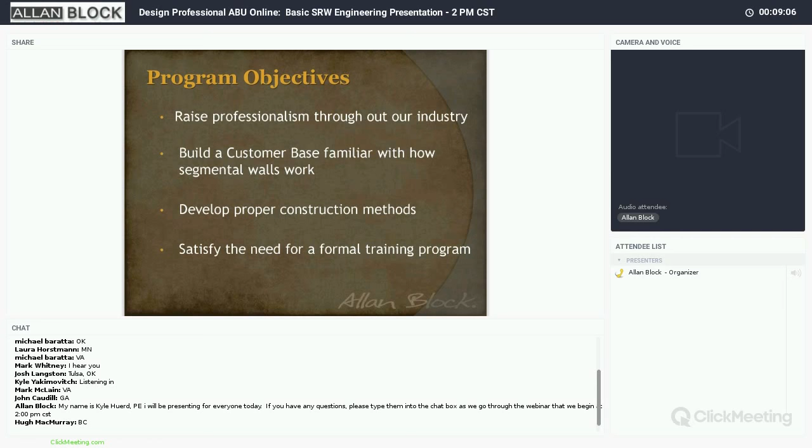So, education-wise, feel free to share the links, but our objective is to make sure that everybody is familiar with segmental retaining walls and how they work. And then we're developing those proper construction methods, and this is really that need for formalized training.

So I had mentioned best practices. This is actually the first page out of best practices that we'll discuss more in depth in August, if you attend that. I believe the last Thursday of the month is August 30th. This really is to start the conversation on having the wall designed early on in the process.

In today's world, we almost do a performance design, and this best practices is really towards an initiative called zero wall failures, and that's really what we're going for. We don't want a wall to fall down. Everything we want to stay vertical. If a segmental retaining wall falls, it's really a black eye for the industry.

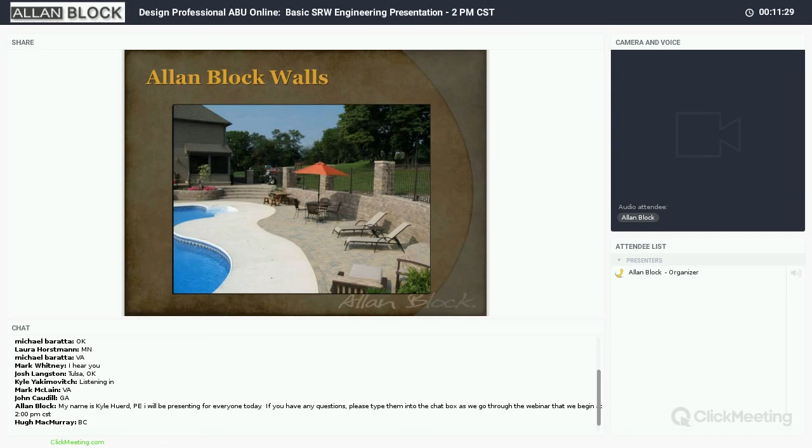So segmental retaining walls can go definitely anywhere; it's kind of sky's the limit. There isn't a max height to a modular block retaining wall. We'll talk about different design reinforcement options through today.

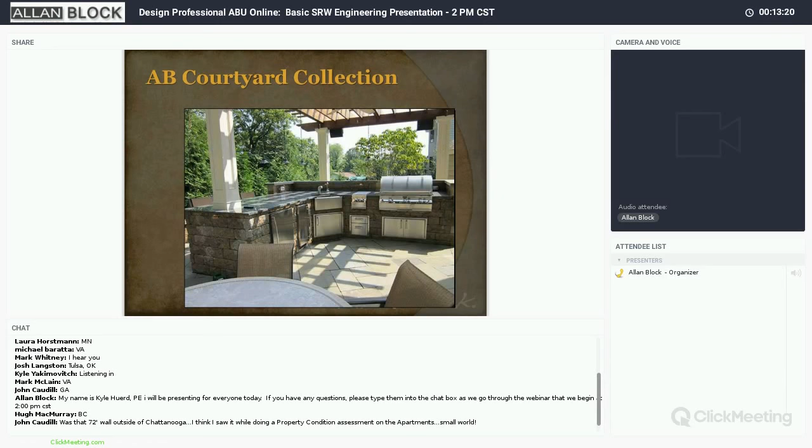So if anybody wants to really play with Legos again and not get looked at strangely, you can always go to one of our distribution locations, and if you've got a small little project, this literally goes together really quickly. But really, your outdoor living, taking those rooms into your backyard.

So the Allan Block advantage is really, I'm not going to bash competitors today. We understand as an industry that when one modular block works, they pretty much all work. There's slight differences between blocks, and there's features and benefits to every one of them. And if one modular block wall fails, it's a black eye for everybody. So from our stance, we really do not want to see a wall fail or fall down or have issues with it.

So our advantage is really, as I've already mentioned, there's 5 engineers here in our office. You can reach out to us at any given time. Regardless of what product you're looking at or using on your retaining wall design, feel free to use us as a resource. We do retaining walls every day. We work with engineers and professionals around the world to help assist on your projects. There isn't a cost to any of our services, so use us, use our local resources.

We do training with our technical reps around the world as well, so that they can bring that technical side right there to your office and stop by and help you out on your project as well.

And then on that training level, there is a certification program. If you didn't know, there's 2 nationally accredited certification programs. There's the Allan Block certification course, and there's the SRW installer course from the NCMA. Both of them are pretty much the exact same program. They have 3 different levels to them.

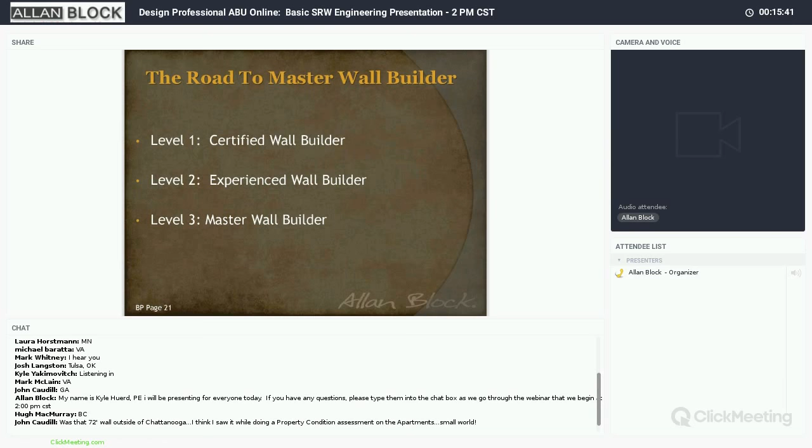So for instance, that 72-foot high wall, hopefully, John, the installer was a Master Wall Builder, somebody that had used the block over and over again. Mainly because we don't want, as I always say, Joe with a pickup truck and a shovel. Make sure that they aren't the low bid and they're not coming in and building this wall without the experience level. So we can qualify contractors from the engineering side, and you can do that through those programs.

I usually ask, since you guys don't have audio with me, if you know the difference between dry cast and wet cast concrete. Being that I'm the only one talking, I'll give you the answer as well as asking. Hopefully, Andrew, you get audio up here shortly.

Wet cast is exactly what it sounds like. That's coming out of a cement truck, for instance. It's a poured wall. Or it's poured into a mold, and then that mold is typically stripped off 1 or 2 times throughout the day. When that mold is stripped off, you're making a block every time it's stripped. So you might be manufacturing 2 blocks per day per mold. And if you have 2 molds, you're at 4 blocks.

Dry cast concrete is the exact same ingredients. So you've got your Portland cement, your aggregate, but you have just enough water to saturate or hydrate the cement, and you're almost creating a sandcastle.

So what that's done, that material is put into a mold box, and then that mold box comes down and consolidates, compresses everything into really a block, and then it's stripped off. Well, typically you're making 2 blocks face to face. That's how you get that split face block, and you have a cycle every 10 seconds. So you're making technically a block every 5 seconds that goes into a kiln and then comes out the other side at your compressive strength or above.

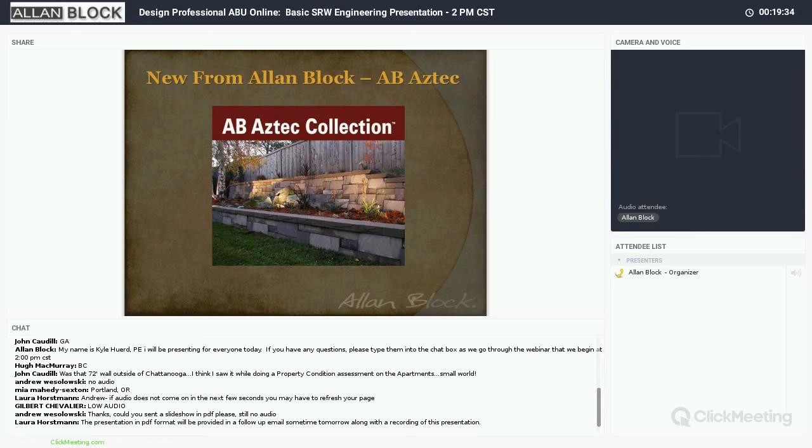And Aztec is really kind of the new product, new from Allan Block here in the last couple of years. It's really a smooth face, kind of textured block. So it's getting away from that split face. We've heard kind of coast to coast that everybody wants a different aesthetic, a different look, and that's what this product line is really bringing to that, which I'll show you some pictures here in just a moment.

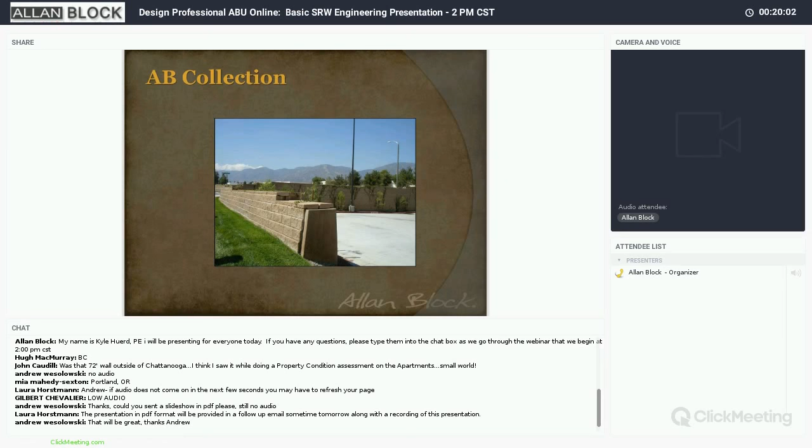But that AB collection, we've seen it for quite a few years. You had that tri-split block in the 90s, and now it's kind of that straight-faced, still split. This can be residential, this can be commercial, this can have fences above, parking lots above, slopes below it, you name it. It is both a backyard and a commercial product.

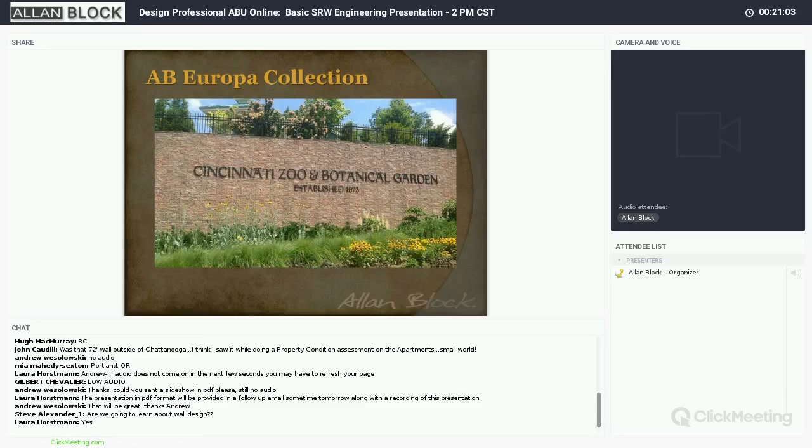Or getting into that Europa collection. That is really kind of that tumbled product. So you take the same block and you beat it up more or less, and it gives it that old style look. So whether that's, again, residential or commercial work, whether it's the Cincinnati Zoo or a commercial property like this, that product again works universally there.

And then the Fieldstone. That is really that natural stone kind of look, that chiseled rock. It does have two different anchor units. You've got a short anchor and a deep anchor. And where that comes into play is so that you can transition from, remain as a gravity wall.

So if we were on a 27-degree friction angle soil with roughly about 12 inches measured from the front face, we're able to get about 3.5 feet before we have to use geogrid or some sort of reinforcement option. If you switch to the deep anchor unit, you can almost hit 6 feet. So you can see if you have a tight site constraint, Fieldstone can definitely be an option.

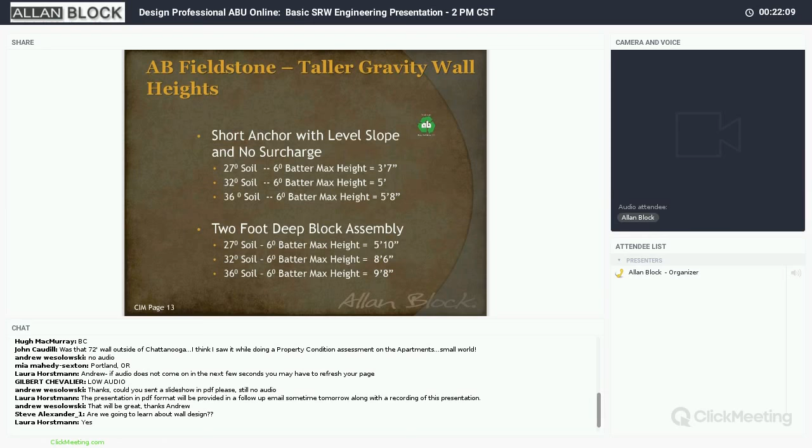But I always recommend reaching out to your local rep, technical rep, or giving us a call to see about availability because Fieldstone may not be local to you. But again, residentially, commercially, you name it, the products don't have that limitation to them.

So really this is kind of a mix between that outcropping block, again, residentially, but upwards of about 8 feet when it's turned over there and butting up to the house on the one side.

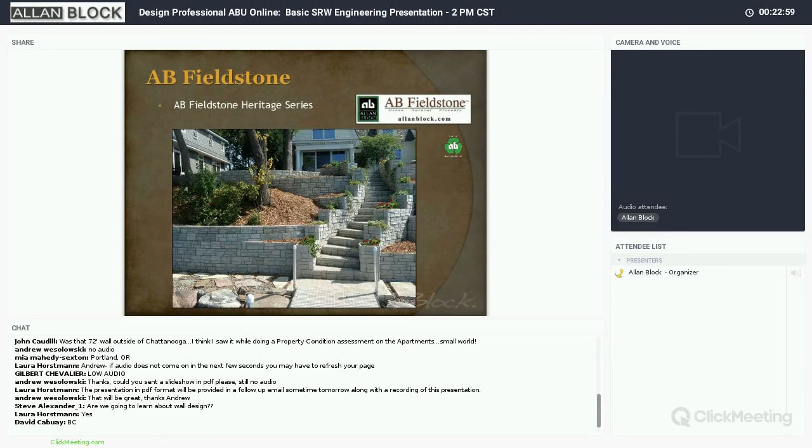And then I had mentioned wet cast. This is actually a wet cast product right here in Minnesota, off Lake Minnetonka, if those of you have ever visited beautiful Minneapolis. So this is a wet cast product, or a wet cast face, with our fieldstone line. So we do have both ends of the spectrum. We've got the dry cast and wet cast, and really just kind of looking for that aesthetic or that solution for your clients.

And then the Aztec. That Aztec is really, here in the last couple of years, been very new to the industry. This is the exact same AB Classic block right here. It's just we put a division plate in between in the mold, so we no longer split two blocks apart. We have a division plate there that gives it that texture. So nothing new on the manufacturing side, but aesthetically it looks completely different.

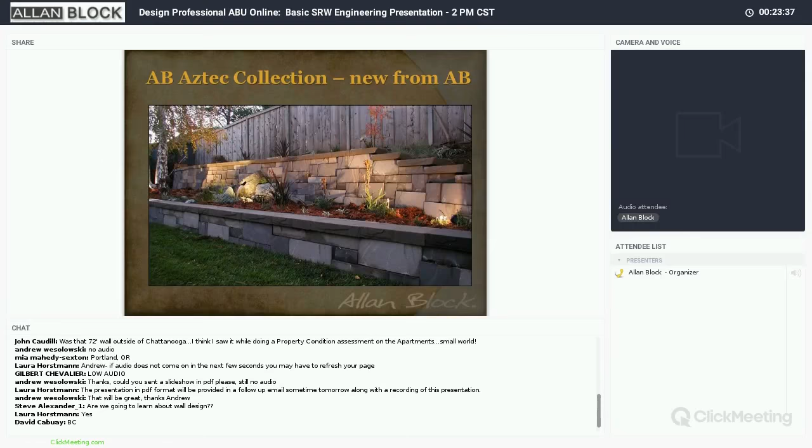So a project here in Cincinnati, Ohio is actually where this one is. So all 4 block pieces put together to create that. And then if you want to incorporate split face block into that smooth face, the Aztec line, you can accent different things and show a lot of different combinations. And all those blocks are exactly the same. You can see here the base course under this wall is all AB Classics, which is our split face block. So they work together. It's still that 6-degree block and works universally through there.

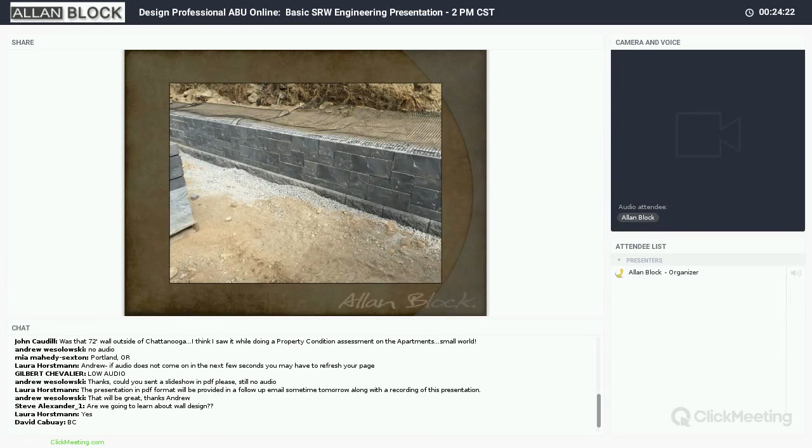So very straightforward. That's as much as I'm going to talk about the product line itself. So I appreciate you taking a little time here to run through that.

To give you the history, Bob Allen Gravier is who started Allan Block. He is the founder of Allan Block back in really the 80s when all modular block walls began. They all began right here in Minneapolis. Whether it was a long winter and everybody just was bored and came up with a block design, Bob came up with his and moved forward.

So I always joke and say this is Bob's first Allan Block we're looking at here with the pyramids. So obviously not the case, but this is dry cast concrete. It's a mortarless construction. That's what the pyramids are built out of, is our dry cast concrete. Made a little bit differently, but same concept. So we know that dry cast concrete lasts the test of time, and we can prove that with the pyramids.

So Bob did get beat up a little bit early on in the industry, mainly because he had a block that was hollow, and he had a front lip configuration to the block, and he didn't have pins. So those were things that the industry instantly started off with: you need to have a solid block and pin system. Today, we've evolved to a point where almost every manufacturer nowadays has a hollow core system, or they're hollowing out the core to really increase performance and shipping, different benefits to that.

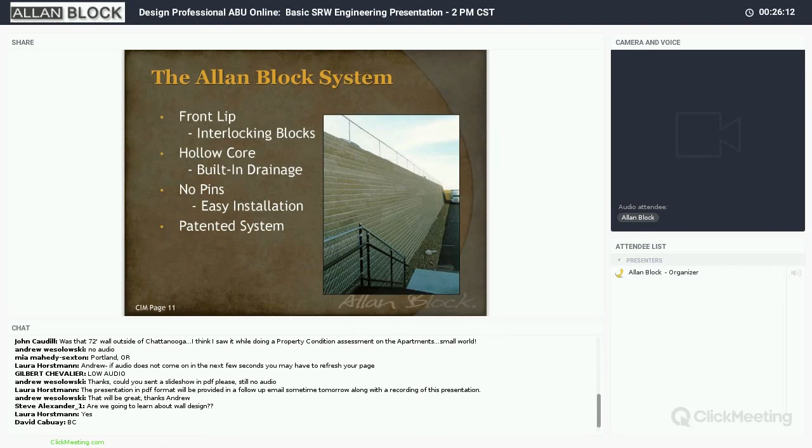So I can always say that Bob was, I guess, a genius for starting that path and sticking true to it. But he did obviously have some issues at the very beginning and hurdles to come over. But that's what an Allan Block is, kind of that hollow core system. It's got back wings to it.

But the huge benefit to segmental retaining walls over a rigid structure like cast in place or masonry walls is the ability to bend and not break. I do have some animations that are built in here, but they aren't working with this platform. So really what we're looking at is a segmental retaining wall that can bend and change with frost. It doesn't have to go down to frost depth. So in Minnesota, 42, 48 inches, we don't have to bury block down there. We can stick to our 6, 8 inch typical buried block amount.

But overall, I've been told by multiple people in the industry that there's two types of concrete. There's concrete that cracks, and there's concrete that's going to crack. That's just how things are. Well, modular block has kind of those cracks built in. That's what makes them able to flex and move and aesthetically still look good, is we're not seeing those fractures in the block itself. Same with your interlocking concrete pavers. It's the same concept. They can flex and move with the ground. So that's why there's such a large market for those things.

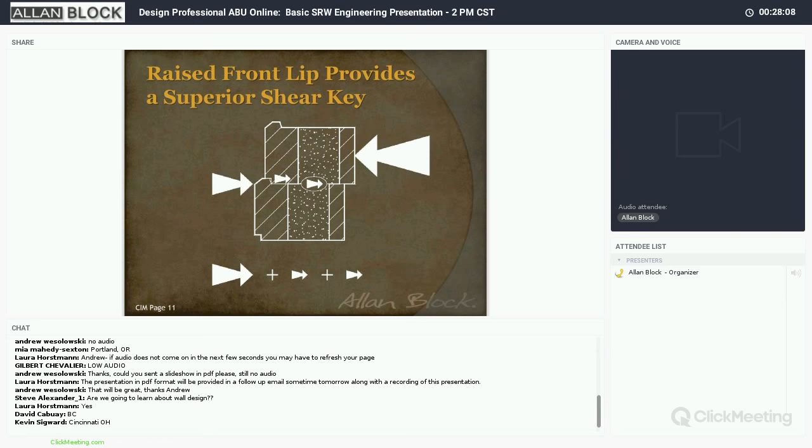So with that lip notch configuration, we have predetermined setbacks. I had mentioned pins. There aren't alignment pins or anything like that for the contractor to use. They stack block and pull the block forward. What you'll notice here is a 3-degree block has a deeper notch on bottom, where that 12-degree block doesn't have as deep of a notch. So you get more batter in the wall. So that's how we can easily switch between two different blocks depending on the application. And it's all preset, predetermined before it even arrives to the construction site.

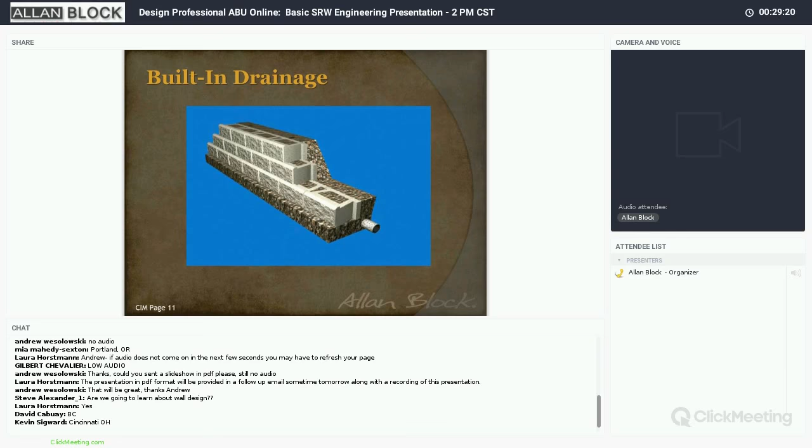And then segmental walls really need your drainage. Right down here, I'm going to point out that drain pipe at the bottom, that needs to be vented to daylight. So commercially, if you've got a storm sewer or slopes below the wall or something like that, that you're able to route that around and come out to daylight, you do need it vented every 50 feet linearly along the layout of that wall. You can come out through the face, which is a very common application.

When you do that, raise that drain pipe up, you want to make sure that this material down here is used as kind of like a road base material. That is, it's got fines in it, it compacts really well, it's going to be impermeable, so that that drain pipe can come out. And really, this is only for incidental water, but we want this almost like a shelf. Water comes down and then navigates out. So that drain pipe should stay dry, and as long as you're routing water above the wall around it rather than through it, it should stay dry 99% of the lifetime of that wall.

And then filtration. I actually want to talk more about filter fabric along the back side here. In the past, the industry has had vertical filter fabric. When the NCMA released their 3rd edition, filter fabric vertically is more optional. And really from the design side, we don't want to run filter fabric vertically because it runs the risk of clogging. And that filter fabric isn't really your landscape fabric, because there are other geotextiles on the market that you could use, like embankment protection fabric, something that's got engineering properties, puncture strength, etc., that we'd use in water applications. We would use that vertically to separate soils and make sure that we don't have moving material.

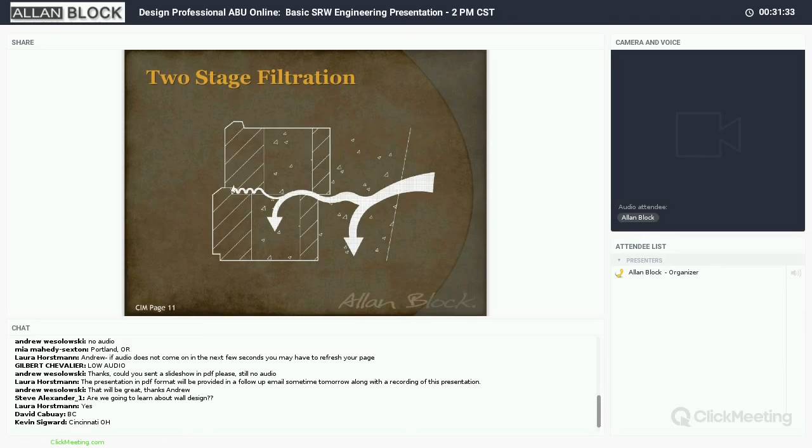And then getting into, I had mentioned a solid block. Bob didn't have a block that was solid when he began. Really, at the end of the day, when you fill a block with rock, with what's called wall rock, your aggregate, your 3/4 inch clean, you get very similar weight. So there wasn't a benefit mass-wise for a retaining wall, since it's all based on mass, that we couldn't get using a block with rock in the core, equivalent to that solid block. So with that hollow core, there are some benefits to it. I'll call it features and benefits here.

Superior drainage: it has technically a secondary drainage field. Even though that is for incidental water, we would hope that any water that does come through there is already captured before it even gets to the wall. But the biggest thing is faster drying. Faster drying helps in the efflorescence category, so there's less efflorescence. Any concrete product can have efflorescence. I always think of brick on a building, because brick's red and you always see the white staining from water. That is efflorescence coming through the product and staining the face, so the chemicals within the product itself actually push through with that moisture. So if the block dries faster, you have less moisture pulling through and therefore less efflorescence.

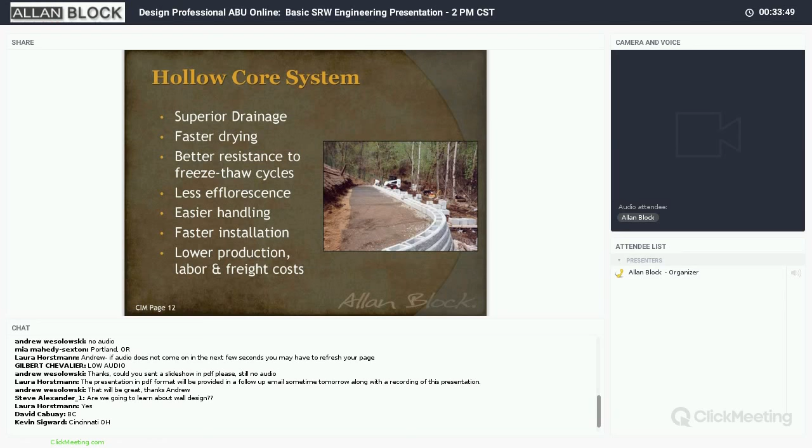So I'm going to go over kind of the basic soils. I'm not a geotechnical engineer, so we're not going to go into the specific properties of soil. I'm actually going to use the friction angle as the natural angle of repose just for today's discussion. And what I'm meaning there is the natural angle of repose here is how high that material cones up. Sandy soil is going to cone up higher than like a clay soil that's very flat and smooth. If you have gravel, it's going to cone up a little bit higher.

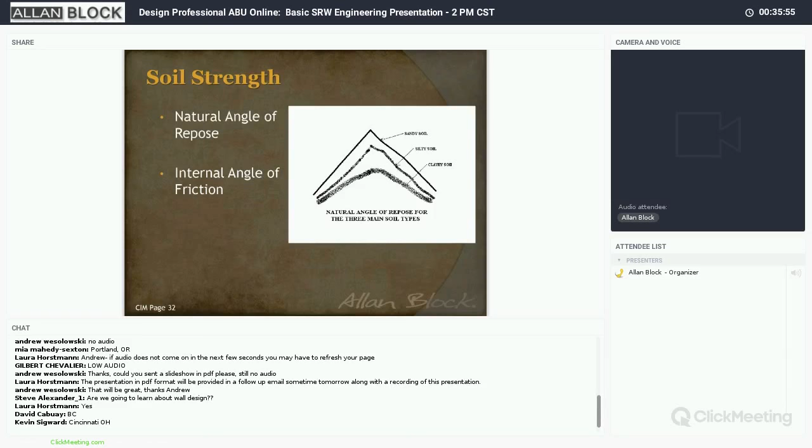Once you add compaction and moisture contents, etc., that's how you get your internal friction angle. That is your calculated or your tested value of that soil, and that's what we use on our retaining wall designs. So again, in today's conversation, we're just kind of going off of that natural angle of repose.

So if that natural angle cones up higher, for instance, the sandy soil has a higher cone, therefore the triangular wedge that's pressing on the back of our retaining wall is smaller. And that leads to our lower pressure. Less soil, lower pressure. Then this clay soil that kind of has this nice large wedge, that's going to exert more pressure on the back of the wall because you have more mass or more driving force there. And that's all based off that active pressure.

So let's talk a little bit about batter real quick and how that calculates into our soil. So if we have our vertical wedge that we just looked at there, in our sandy soils, we've got that vertical wedge. Well, if we take batter of the wall into play, we reduce that wedge. You can see here we reduce it by almost 50%. So a smaller wedge, therefore less pressure again. So that's why many manufacturers around the world have products that are somewhere between 3 and 12 degrees. Most projects are actually dialed in closer to about 6 degrees, somewhere between 4 and 8.

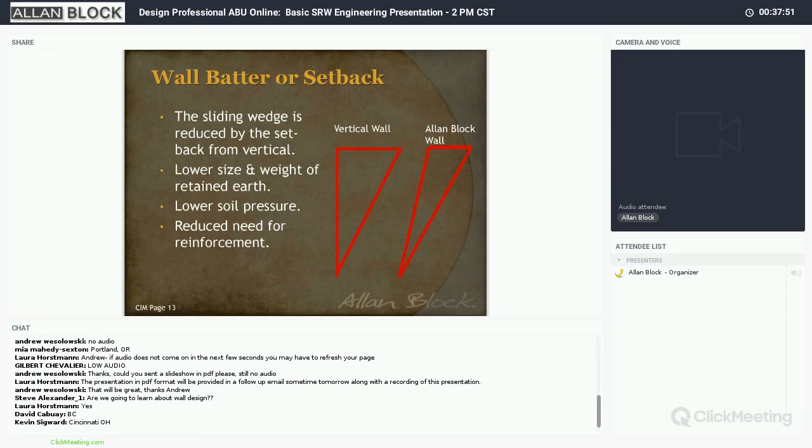So, excuse me. So having those products available, engineer-wise, we're able to reduce the amount of pressure with that batter. But at the same time, we're looking at how much space does that take up. With every setback of a block, you lose some real estate above the wall. What's that balance? In the 72-foot high wall, that has a tremendous amount of batter, especially in 3 tiers, upwards of about 25 feet a piece. So you do have to take that into account.

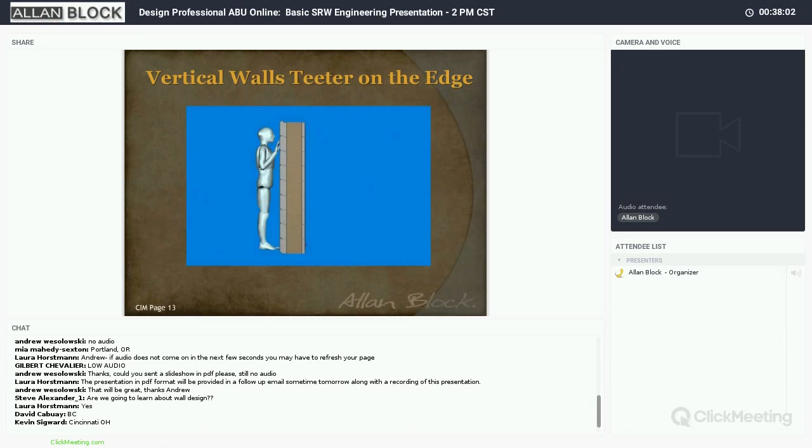My animations here won't work. What I've got is I apply that wedge here to the wall, and my guy falls down. I take that wall and then I push it back into the hillside 12 degrees, and my guy stays vertical. Very similar to what we're looking at here.

So if we look at a 3.5-foot high wall, our active earth force, you'll see 217 pounds. Just with the batter itself, it reduced it 25%. And you can also see your Ka value. So that's our active earth coefficient. That also reduces. So as soon as your Ka value reduces, you have less pressure. And that Ka, I'm about to show you the equation in a couple slides here to really dive into it.

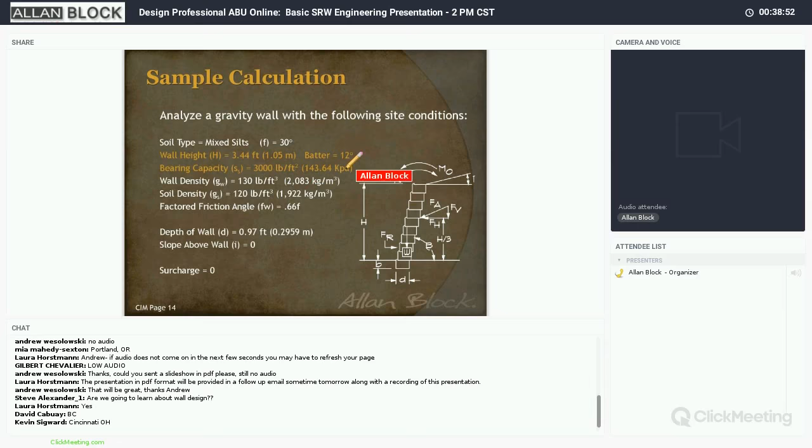So looking at our free body diagram, my example wall here is about 3.5 feet with a 12-degree batter. So when we throw it into our equations, that active earth pressure coefficient is right here. This Coulomb equation is dialed in to include the batter. B stands for batter, F stands for friction angle of soil, and I stands for your slope above.

So on the design side, if you change the batter of the wall, the soil behind it, or the slope above it, you change the design of that wall. Increasing the batter will actually reduce our coefficient here. And it's the same concept if we increase the friction angle; we're also going to reduce our coefficient.

Since our resistant force is all weight on a gravity wall, we're looking at that right here. We drop that into our factor of safety, with 1.5 being the industry standard minimum in sliding. If we look at our overturning resistance, same concept. We're still looking at our mass. Our resistant moment is all due to weight. And in overturning for an almost 3.5-foot high wall, we've got a 2.6. And 2.0 is our industry minimum for overturning.

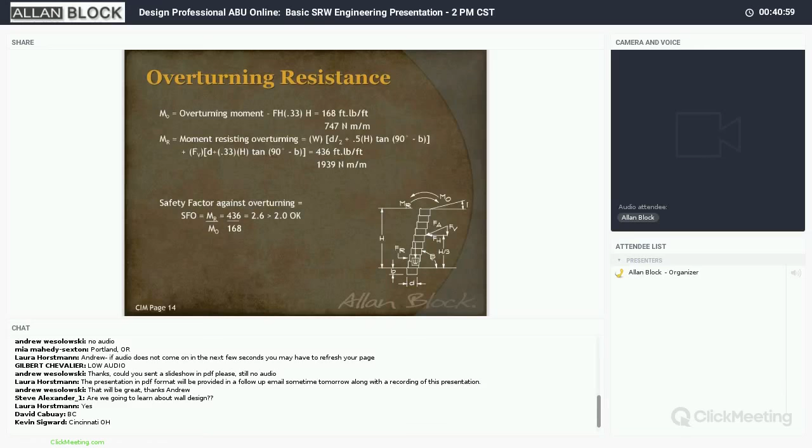And the sliding factor of safety of 1.5 does not account for any kind of passive pressure in front of the wall. Have you guys ever seen a wall that's failed in sliding? It's not too common. Most retaining walls are going to fail in overturning before they do in sliding. But remember, we don't apply any passive pressure in sliding or technically overturning in segmental retaining wall design. So that's an added benefit to the system.

But keep that in the back of your mind, because in most ordinances engineering isn't required until 4 feet. I'm guessing you can drive around your area and find modular block walls that are slowly beginning to overturn, right? And they're probably right around that 3.5-foot high wall where geogrid possibly wasn't used behind there, or some sort of external load was applied. So keep that in mind. It's kind of that 3 foot.

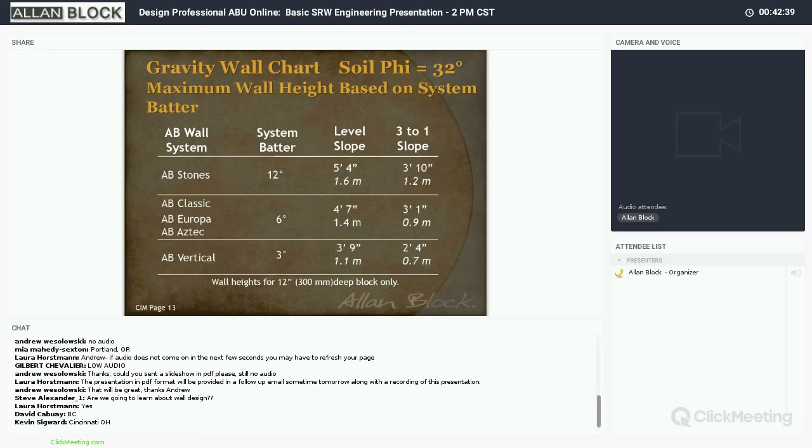Even in good sandy soils, I'll call 32 degrees our sandy material, if we come down here with a 3-to-1 slope above, with that 6-degree product again, right about that 3-foot mark. So 3 foot is oftentimes, for a 12-inch deep block, the max height before you need to start talking about reinforcement. And this is before even adding surcharges, any kind of load above that wall.

So if our gravity wall with a 12-inch deep block doesn't work, you can create a taller wall with what we call a double block wall. With Allan Block, you can take this back block, spin it around so the backs are touching, and then flip the block over so the lip is down. That allows the block to stack up in the same batter as the front face. So we're increasing the depth of that block to 24 inches rather than 12, so we can go taller with our gravity wall.

But if a taller gravity wall or a double block option doesn't work for you, maybe you can use no fines concrete. No fines concrete is a permeable concrete mix. It's a mix without sand, so it allows water to drain through it. You can see here it's free draining.

What that allows you to do is create a block that's any depth you need per the design. So if any of you are familiar with large blocks on the market, this can definitely be an option for you as an alternate. Technically, with a small block and no fines concrete, you're creating a big block on site without that manufacturer's cost.

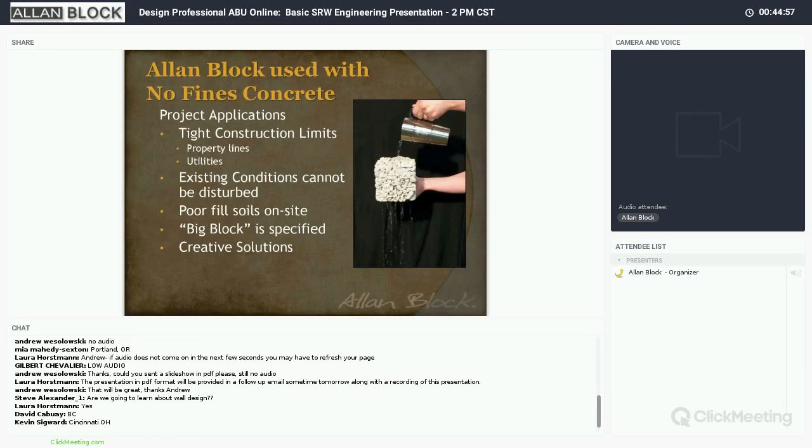You can do it on new construction. You can do it on existing timber walls or existing any retaining wall. You can face it with something different. Now keep in mind that this wall is actually designed so that if this timber wall wasn't even here, this wall has enough mass already to resist all the pressure and the surcharges from the alleyway above. So you're really just kind of sealing up this timber wall into the hillside. So regardless if that deteriorated, you still have enough mass there to resist that.

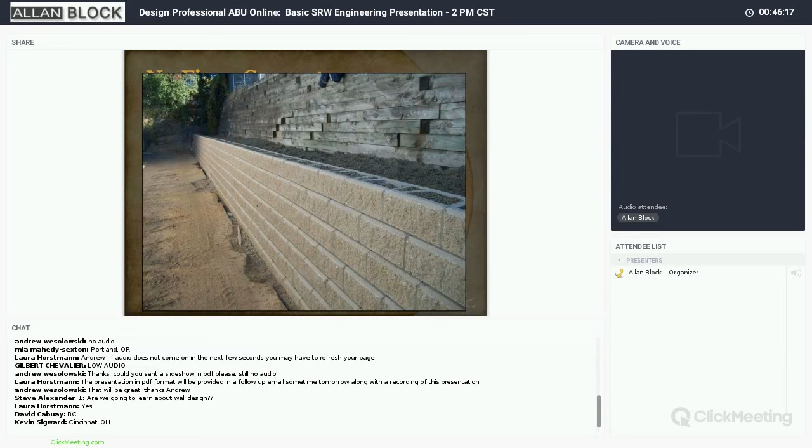So I'd mentioned it's very dry. Some places, if you get into kind of the western side, Portland, so Oregon, Washington, Idaho, that area, we refer to no fines concrete as stabilized aggregate. And the industry has really started using stabilized aggregate more than no fines concrete, mainly because the inspectors, as soon as you hear concrete, they're thinking slump tests and compressive cubes and that sort of thing, where this is really an aggregate that has a little bit of cement in it to solidify and hold up.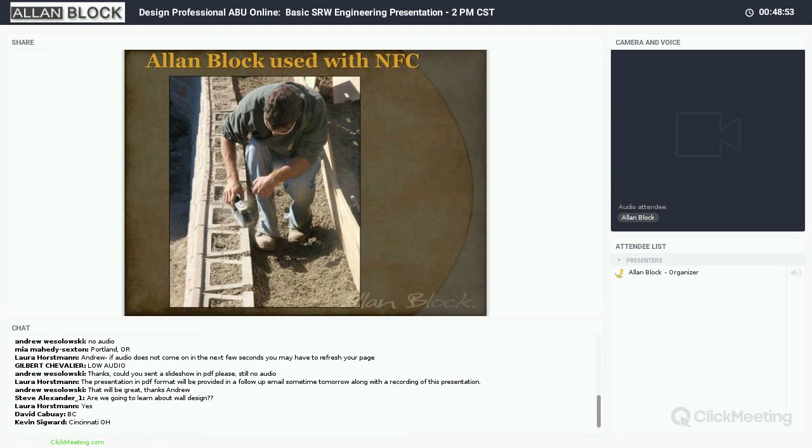Our tallest no fines wall is actually one that I had down in Georgia. It's 26 feet. They couldn't make anything else work. Geogrid couldn't extend into the hillside, so that was kind of their option, and it was still cost effective compared to a rigid structure, sheet pile, soil nails, that type of thing. So definitely options there available to you.

And then we've got a no fines chart. This chart only goes up to 10 feet, but I had mentioned you can do a no fines concrete design within AB Walls, which is our design software. And overall, that design software provides you those calculations and the full package of what you need. But here you could use a quick reference.

Bill, you asked what was the depth of that concrete on the 26-foot high wall. I believe it came out to be 40% the height. So without grabbing my trusty calculator, I think that's right around 10 feet, is the overall depth behind that. But as a rule of thumb, you're probably somewhere between 30 to 45%, which is very common for most of them.

So that's a no fines concrete mass. So we looked at gravity walls, double block walls, no fines. Really, we're going to talk now about soil reinforcement, so geogrid. And I go right back to actually the Great Wall of China here. They used branches actually to reinforce the soil. So that is technically a natural geogrid or a geotextile. And so the history of geotextiles really began back then, very similar to our mortarless concrete.

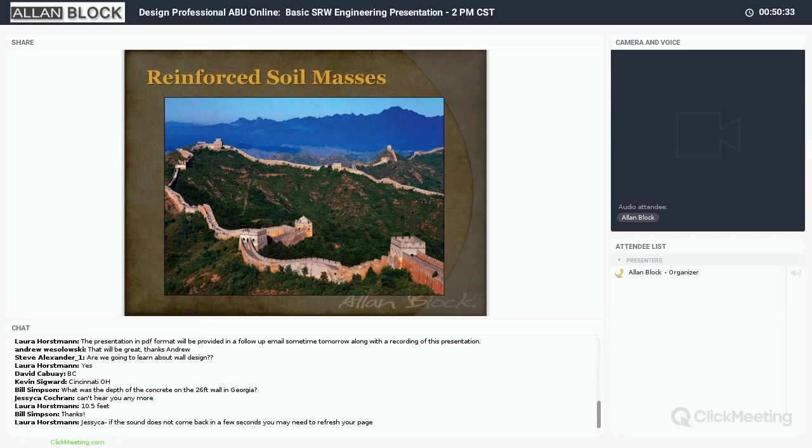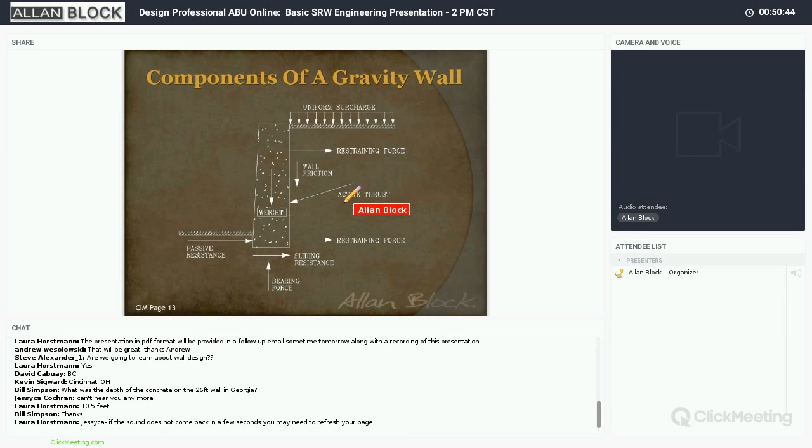So the components of our walls, we need mass. That's really what we're looking for. We need that mass to resist any kind of lateral pressure that we've got, or that active force that's pushing on it. So if we look at, for instance, a cross-section, if we're using geogrid reinforcement, we've got these soil layers coming back; typically your minimum length is 60% the wall height. But technically, what we're doing here is we're reinforcing this mass. This soil is now our new mass that we're going to resist all those pressures.

And this acts as a coherent mass. So the block isn't independent from the grid, which isn't independent from the soil. They all work together, very similar to your concrete rebar designs. Rebar reinforces concrete to add that additional strength to it. So here we're reinforcing the soil with our geotextile.

With that geotextile or geogrid, typically a vast majority of grid on the market is uniaxial. So that means it has strength in one direction. It needs to be rolled out properly. And that is something that we emphasize in the contractor training courses that I had mentioned earlier. Make sure that the contractor rolls out the grid appropriately. If it is a uniaxial grid, you'll have strength here that you'll roll out perpendicular to the wall. But you actually have only about 60% that strength in the opposing direction. So if they rolled this out incorrectly and we need that strength, we now lost that and we could potentially have an issue long term.

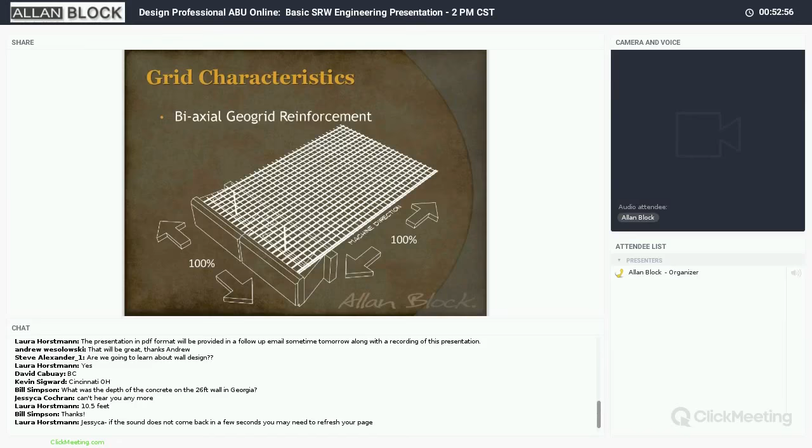So there is biaxial grid on the market. Most biaxial grid is used for retaining walls 6 feet and under. There are some geotextiles that are biaxial that we use in bridge structures, but that biaxial grid, I always call it the drop and kick method. You can roll it out with the wall. It's going to have strength in both directions. So just know on your projects which grid you're specifying, which grid the contractor actually orders and delivers to the job site, and make sure that's inspected, especially on those larger commercial jobs.

All right. So I mentioned connection really quickly earlier. With that hollow core system, you actually increase your connection capacity because your connection comes from your interlocking, or the interaction of your rock with geogrid, your material with geogrid. So hollow core systems actually have a superior connection strength. And it's what we're referring to here as rock lock connection.

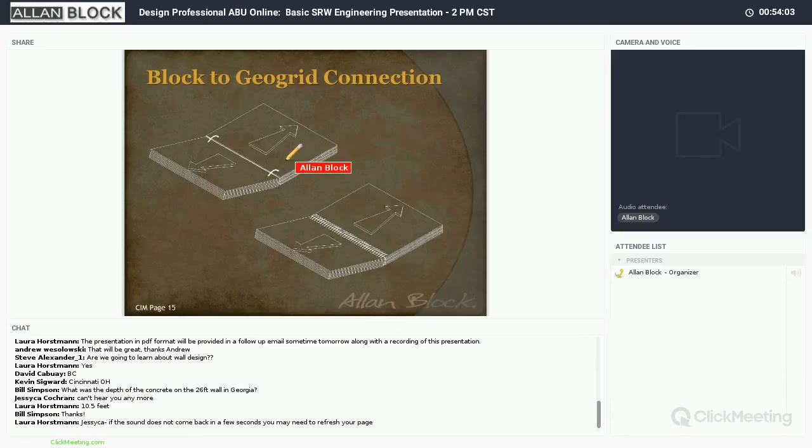A hollow core system is continuous at the face all the way through. So it's our spiral bound notebook. Think of it as it's harder to pull this page out, rather than if you have, and I'll use the pin in this case, any kind of point load system, then it may be easier to pull this out. So that hollow core is, again, why a lot of manufacturers have gone to hollow core block over solid block over the years. And then I already mentioned continuous at the face.

This rock is going to fall and interlock between these holes; typical holes on geogrid are 1 by 1, and we're using like a 3/4 inch clean. And then you pull the grid back; you don't have to tension it, but just make sure that it gets all of the slack out of the geogrid itself. And then that grid, getting away from the face, interacts with the soil around it. So it's going to have interaction right here.

And really maximum spacing for the industry is 3 courses. Best practices, which we're going to talk about at the end of August: the industry is really pushing for 2-course spacing, or every 16 inches vertically.

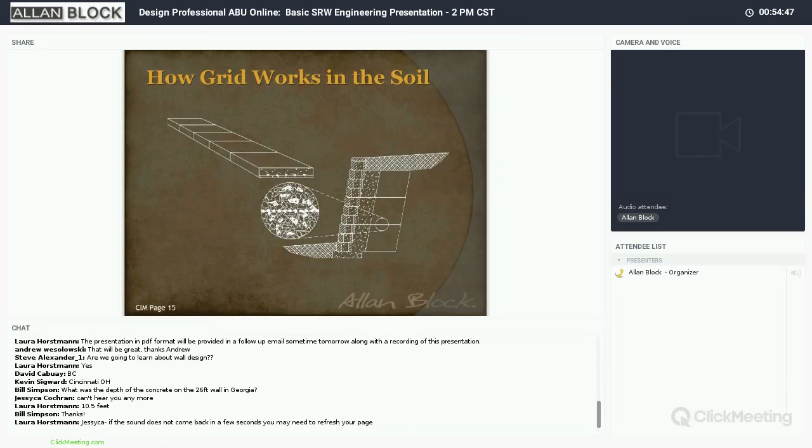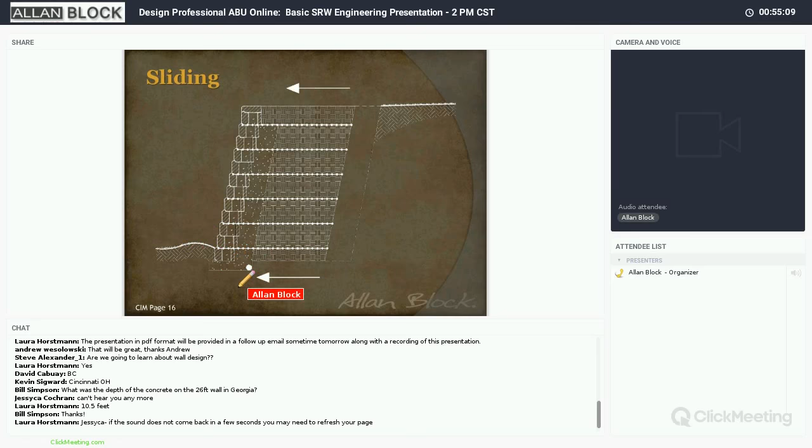So to determine if our mass is sufficient or not, what I'm going to do is show you really our external and then internal calculations. I've got some animations here, but I'm actually going to jump past them. Sliding is one component for external that we're checking. Again, we don't take into account any kind of passive resistance in front of the wall.

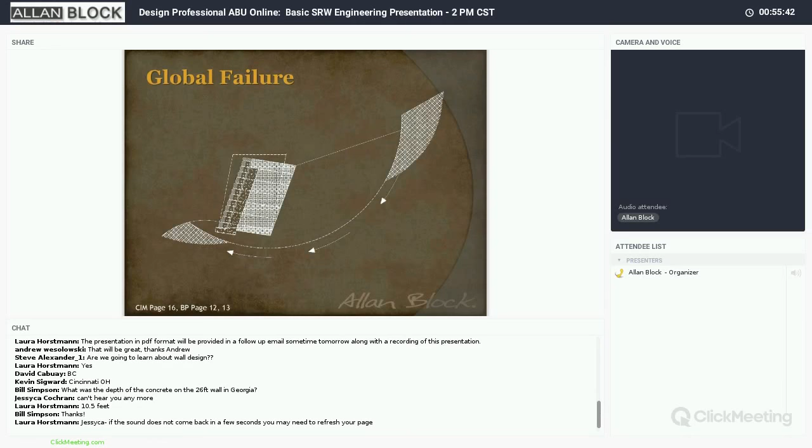Overturning failure is that whole mass wants to overturn. Bearing, so what kind of foundation soils are below the wall. And if we have a bearing issue, most times we can compensate by bringing in select fill on our sites. And then external stability also would include a global failure. If this wall was designed perfectly, but the entire slope fails and goes for a ride, that retaining wall is also going to slide down that hillside. So those are our external.

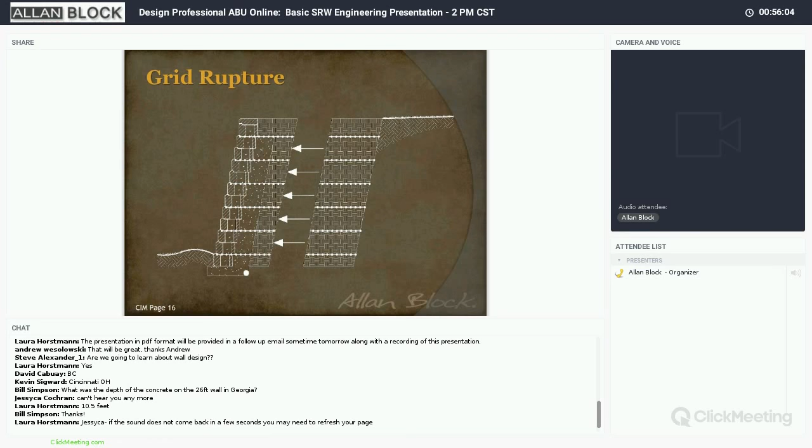How tightly our soil mass holds together, how tightly knit our structure is. Like I said, concrete and rebar, but that's the same concept here, the geogrid working with the soil itself. And we do check internal calculations, which would be rupture. So how strong is that geogrid? We look at soil pullout. If you think of this as a failure plane or a line of maximum tension that goes up, you need to make sure that the geogrid extends at a minimum 1 foot beyond that line. And that's what your grid pullout calculation really pertains to. And then lastly, your bulging.

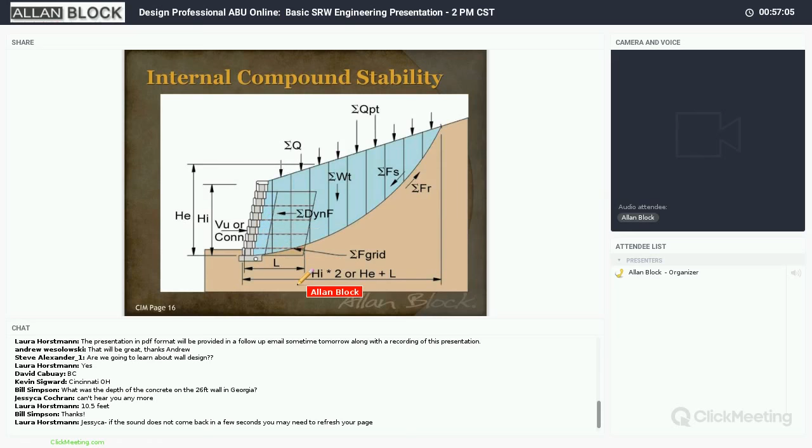This is really characterized by internal compound stability, ICS for short, which was adopted in 2009. Bishop's analysis is really what we're looking at, but all these slip planes have to come through the face of the wall. If any slip planes dive below, that's a global analysis. So ICS is limited only to those slip planes coming through the face of the wall, but that's how we characterize that bulging failure. Maybe we're missing a layer of grid in here, and all of a sudden we've got a slip surface that comes through and makes a bulge right here in the wall. So all those things are checked for in AB Walls design software, which if anybody's interested in getting a copy of, let us know after the presentation.

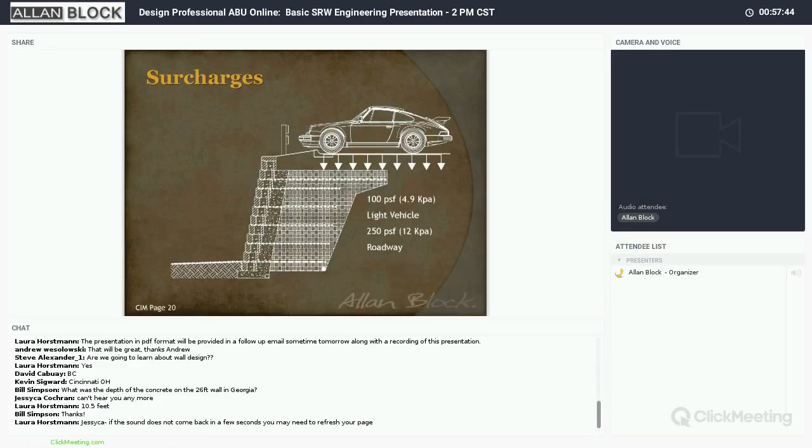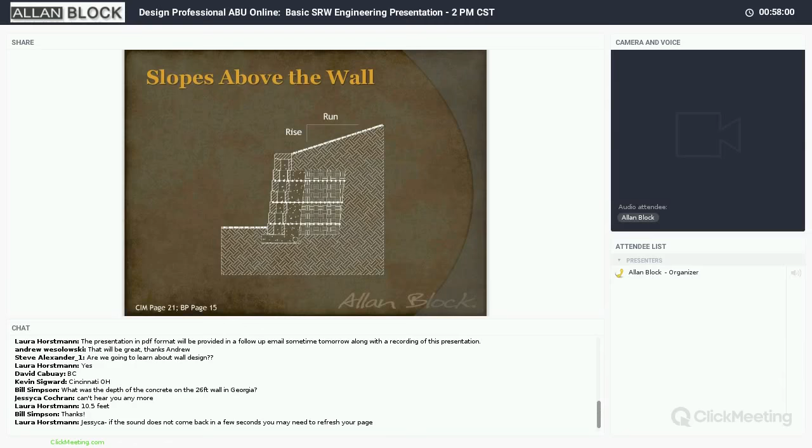So now, developing your plan for your site. You need to know how tall your wall is, what's above it, types of surcharges or loads. Those surcharges can be a commercial roadway, a driveway, a sidewalk, a light vehicle load, a generator pad, a foundation of a building. It could be a lot of different things. A surcharge technically can be our seismic load, which we'll talk about shortly. But then even slopes above. Remember, our slope above increases our Ka value, which therefore increases our pressure. So that slope above adds a tremendous amount of driving force on our calculations.

And then slopes below. The industry really doesn't look at slope below for internal and external stability. That slope below the wall is really for global stability. If you have a slope below the wall, the rule of thumb is a 5-foot horizontal bench, so you want 5 lineal feet of flat surface before you intercept the slope. You can slope this up to the face, but then that's enough buried block. The NCMA does have a design calculation you can look up for how tall your wall is and how steep your slope is, and it will give you a minimum. But that rule of thumb is that 5-foot horizontal bench.

And then we talked about sand and clay, the different particle sizes, and differences between those materials. I'm going to skip through those and talk more about water, because water is really the number one reason why a retaining wall fails. We have to make sure that we route surface water around retaining walls rather than over them. Swales and berms above the retaining wall navigate water around. So rather than having this slope above and water pouring directly over the wall, we can put a swale in to bring it around our site. Because if water infiltrates behind the wall, that's a major concern. That's the main reason why walls fail.

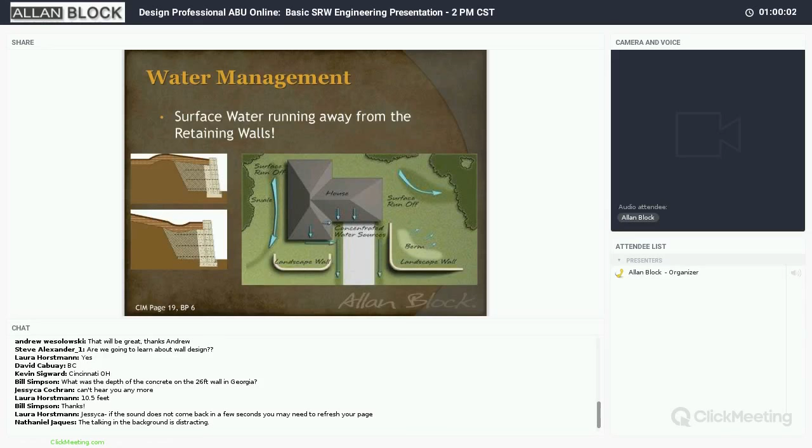So, Nate, thanks for the note. I'll make sure that someone here in the office touches base there.

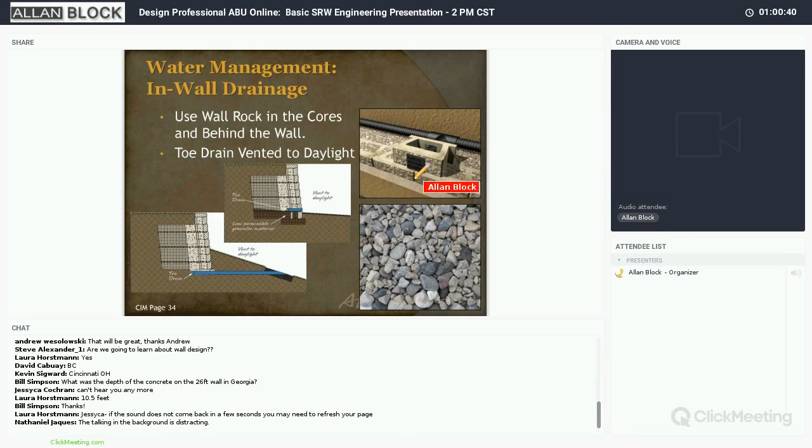So, those swales can be clay lined, concrete lined, you name it. Other things would be water sources, downspouts, check valves on sprinkler systems. Here you can see they routed that downspout into a solid pipe, and it comes out through the face of the wall. So make sure those concentrated point sources are taken care of. And then drainage directly behind the wall. We want to make sure that we vent that pipe out to daylight. This is the old school way, coming through the face. I'm going to show you right here, Wall Drain Pro.

It's a phenomenal product. It's not an Allan Block product by any means, but this is actually only 1.5 inches wide. It's a small little grate that then goes back and tees into that drain pipe at the back side. So aesthetically, it looks good. It doesn't require the contractor to cut block, and it's a simple way of daylighting through the face of the

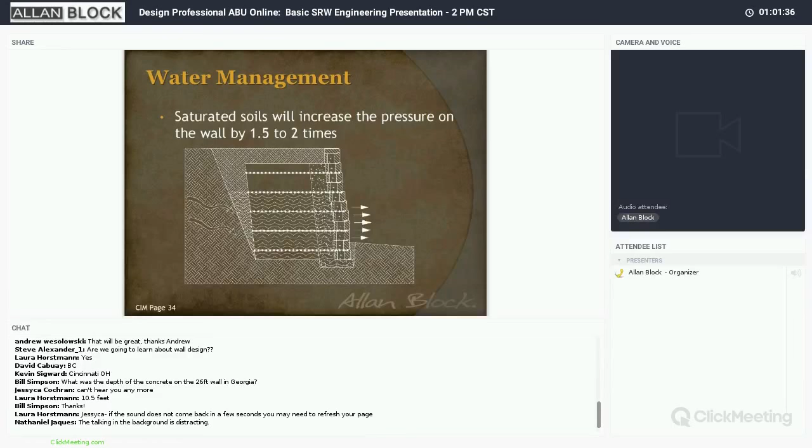block. And why we want to do that is if any incidental water or subsurface water gets in behind there, that adds 1.5 to 2 times the pressure on the retaining wall itself. So we need to make sure that we capture that. And you can capture subsurface water with blanket and chimney drains, like what we're seeing here. So blanket drain across the bottom, chimney drain going up across the back, and that's really that clean stone. So any incidental water or subsurface water that comes in here routes down to the drain pipe and comes out.

So if you have water concerns on your site, you excavate in and there's water, make sure that the contractor is stopping and using more clean stone, especially if the design didn't call for this. That would be something to work on immediately.

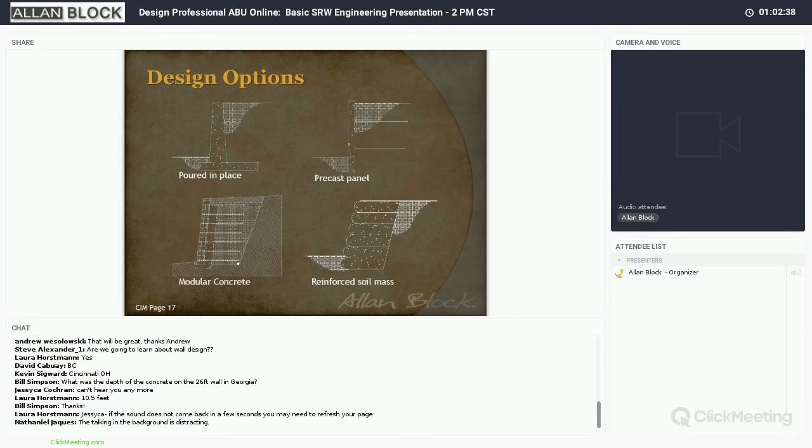So for the design options, really kind of going around. Poured in place in the 70s, went to precast panels, reinforced soil masses or grid-wrapped walls. These are still used today. Modular block is really just a facing on that soil wrap. It's a higher aesthetic. You're able to go a little bit more vertical, but then it doesn't have the erosion concern that you may have with a soil wrapped wall.

And then the other alternatives, masonry reinforcement. So we talked about rigid structures. You can do rigid structures with segmental retaining walls, whether that's masonry with a full footing going down to frost, or if you're looking at a soil nail or earth anchor, you can face any of these types of retaining walls with a modular block to increase that aesthetic.

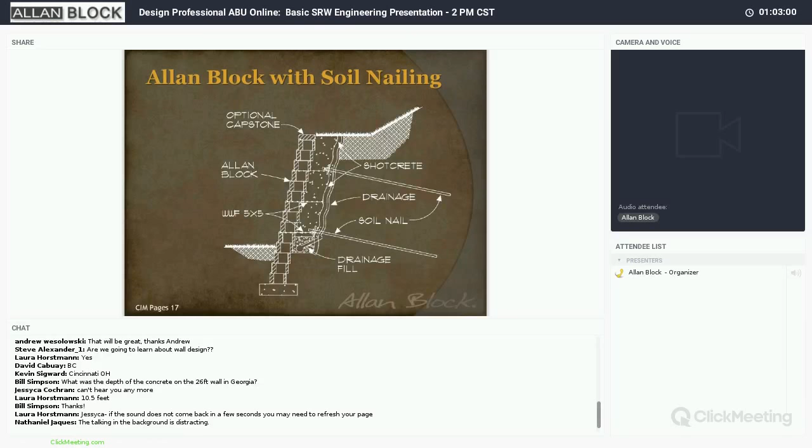Just to give you an idea, just remember that you have a total wall structure, and that includes batter and geogrid, so that you know how deep into that hillside. And again, AB Walls is actually providing that to you, built into the program. So that setback chart, to give you an idea, on a standard 6-degree wall, which is very common, you're looking at about 1.25 inches per foot.

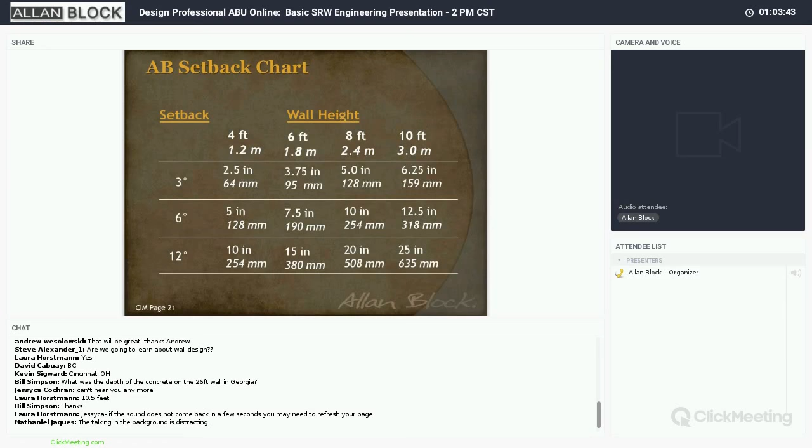So this is for a 10-foot high wall. You have about 12.5 inches of batter in that retaining wall itself. So that amounts to a lot, especially if we're talking about that 72-foot retaining wall. That's a lot of batter built in there that has to be accounted for during the design process.

And then terraces, making sure that if the upper terrace is closer than 2H... now most of us here are engineers, so we can calculate that line of maximum tension. We can find how close we can get this upper wall so that it doesn't influence the lower wall. But 2H is a rule of thumb. So this 4-foot high wall down here may actually be designed as an 8-foot high wall, since it's got geogrid running through here, and that upper terrace is closer than 2H.

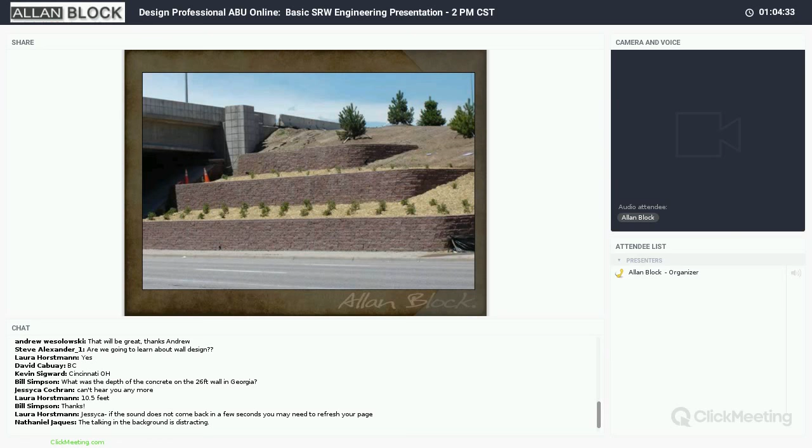So for instance, on this wall here, these are 6-foot terraces. This bottom terrace actually has 18-foot grid behind it, because it ends up being a 22-foot grade change from bottom to top. Terraced applications might have additional grid, and obviously for global stability. That's probably going to be the ruling factor there.

And then with modular block walls, radii are going to change depending on product. To give you an idea, Allan Block Classic, which is commonly used, 4 foot is the tightest that block can go. So you can get a really tight radius out of it, but you have to remember that 4 foot has to be at the top. It can't be at the bottom. So you can't start your wall at a 4 foot radius because you lose a little bit every time because of the batter of the wall.

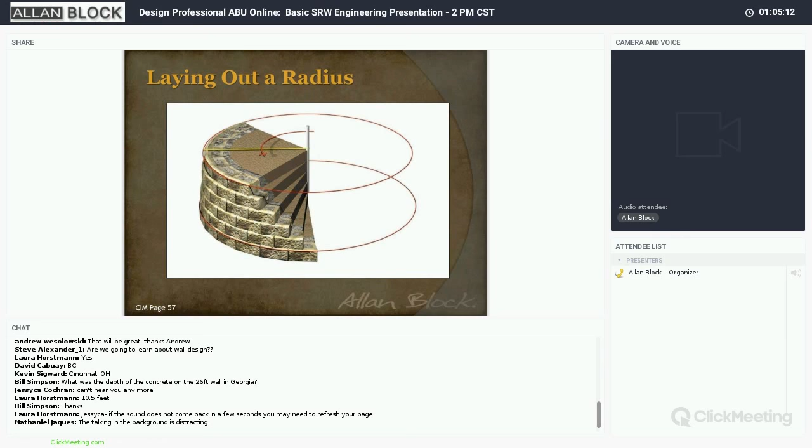So to kind of wrap things up, I want to talk a little bit about lessons learned on the industry. We've learned from our mistakes. For one, there isn't a fluorescent orange geogrid on the market, and snow fence is definitely not geogrid reinforcement. So this really emphasizes contractor training, making sure they know what they're supposed to be using on sites.

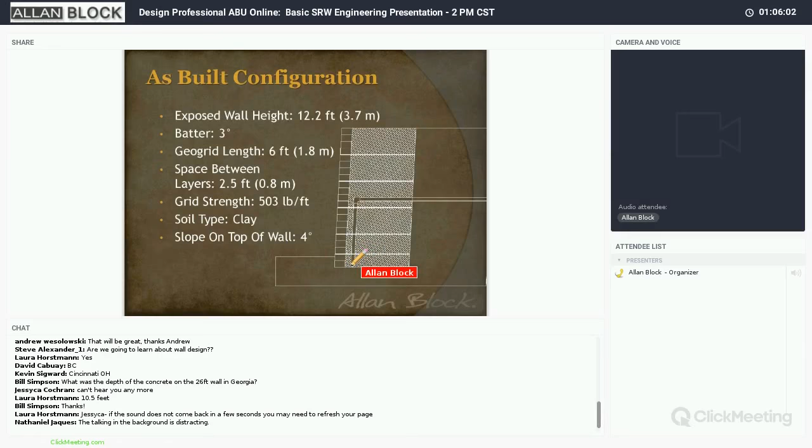This is kind of the project where everything that could go wrong did go wrong. This is homeowner, contractor, engineer. He did everything. 12-foot high wall, 4-course spacing. This is actually a pipe that brings all of the water from his downspouts, including his sump pump from his house, and he brings it right down here to that drain pipe. So he's bringing water into the system, which is obviously a huge red flag.

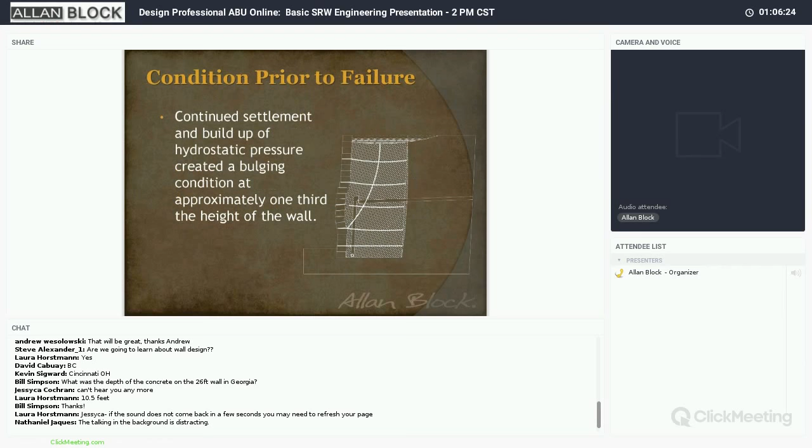He didn't compact anything, so he actually had an average settlement of 8 inches. And when he had that settlement, he sheared the pipe. So the next time he had a rainstorm, it ponded above the wall and poured water in behind the wall. And so now we've got hydrostatic pressure, and of course I wouldn't be showing you this one without a failure. This is the only project where we've ever seen our shear lip come off.

What happened is the grid actually held up in tension for all that increased pressure, but then all of a sudden the grid ruptured, and as soon as it ruptured, it wasn't a slow failure. It was like a bomb going off, and the blocks shot straight out and sheared off that lip. So that's actually the only known case where this took place.

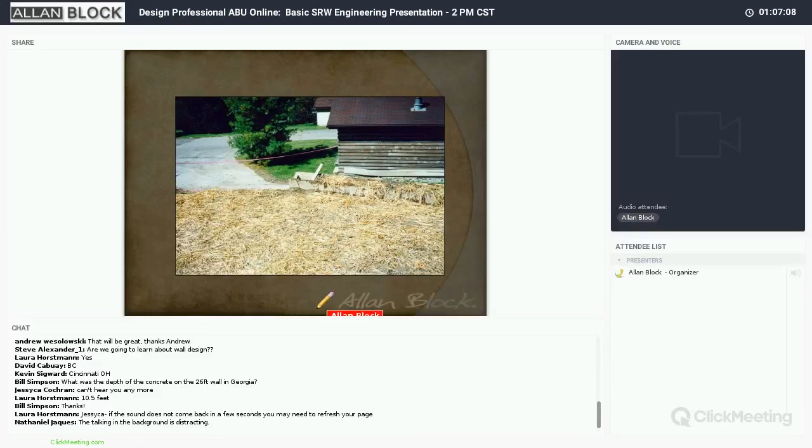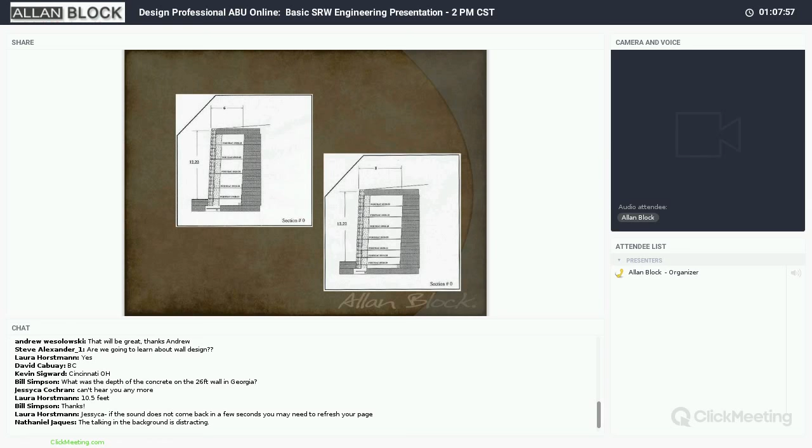Looking at an as-built, this is his design as he built it, and this is the design we looked at after the fact. So you'll see that 8-foot grid instead of 6-foot, and then we have 3-course spacing as our max spacing. The big one here, if we look at his calculations, factor of safety for overstress right there at the top: 0.74. So this wall was already failing before it had even settled. It was just kind of a ticking time bomb, whereas our calculations came out to be 2.18. It's kind of that limiting factor.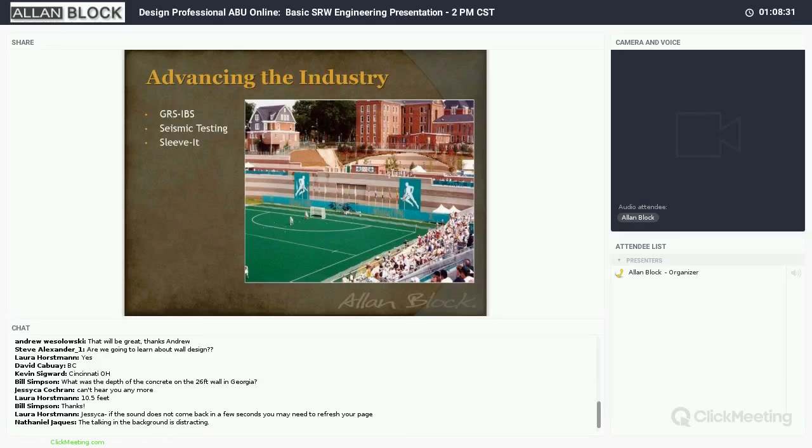But these are the things that we really learned and were able to advance our industry with. So nowadays, if any of you are familiar with bridge abutments, GRS-IBS, you can do a lot with modular block retaining walls. We've talked about that 72-foot high wall. There's plenty of those around the country, around the world. Nowadays we're using our block and reinforcement as a bridge, a single span bridge, for instance.

This is actually emphasized by the FHWA. So we're looking at single course spacing from bottom to top. We actually have 6-inch spacing across the upper few layers, so that the superstructure sits directly on the soil mass, not on the block, but on the soil. So there's a lot of advancement and understanding of these soil structures that we're using nowadays.

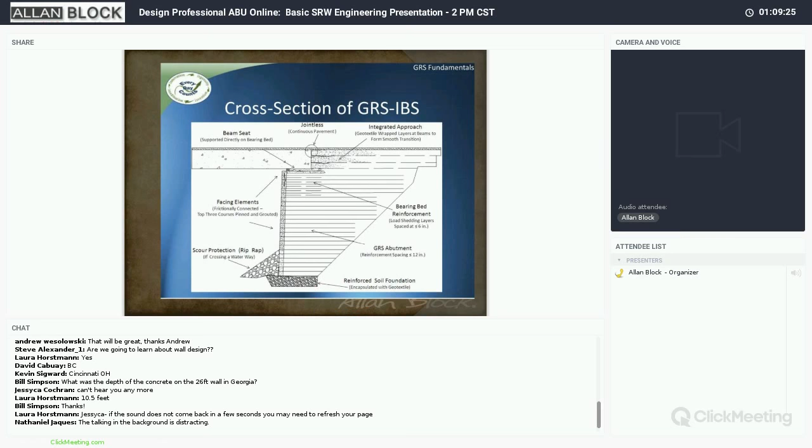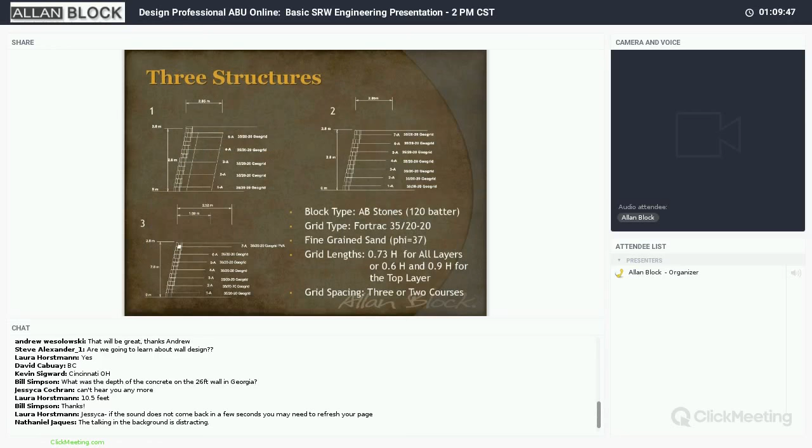And then seismic. As I mentioned, we actually did seismic testing, modeled after the Kobe earthquake that you're seeing here, which decimated the entire city in Japan. We are still the only company that's done full-scale seismic testing, and we released that to the NCMA as a way for our industry to grow again.

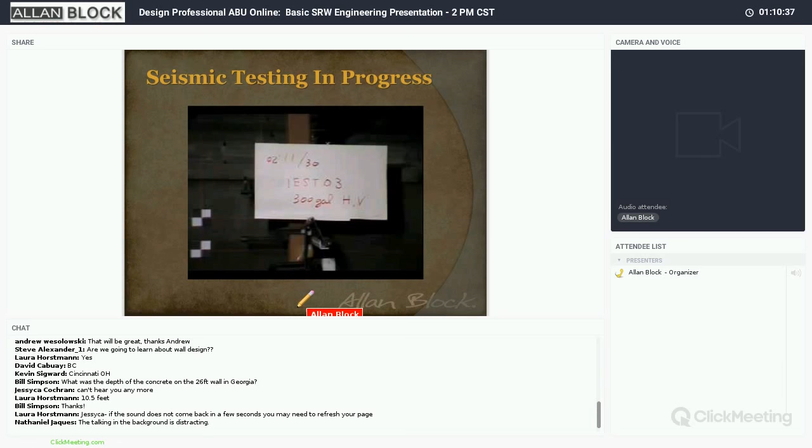So it was very eye-opening to the industry, and again, you can get all of this information directly from our website, including this video. I'm not going to play it here, but we have the full seismic shaking on the shake tables, which here's a picture of, constructed over in Japan back in 2001, 2002.

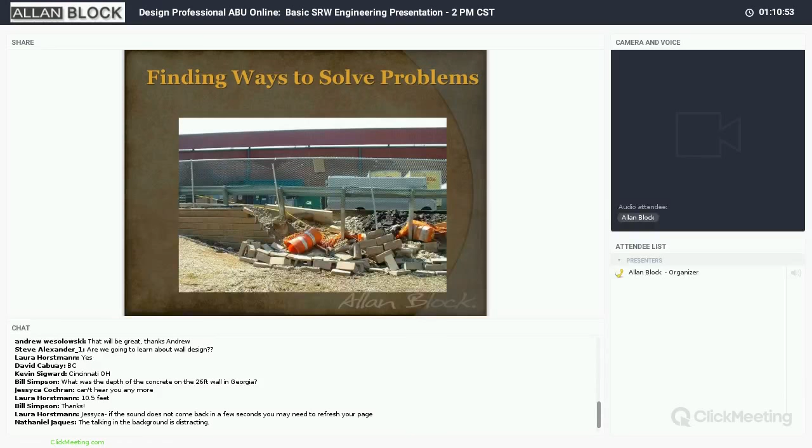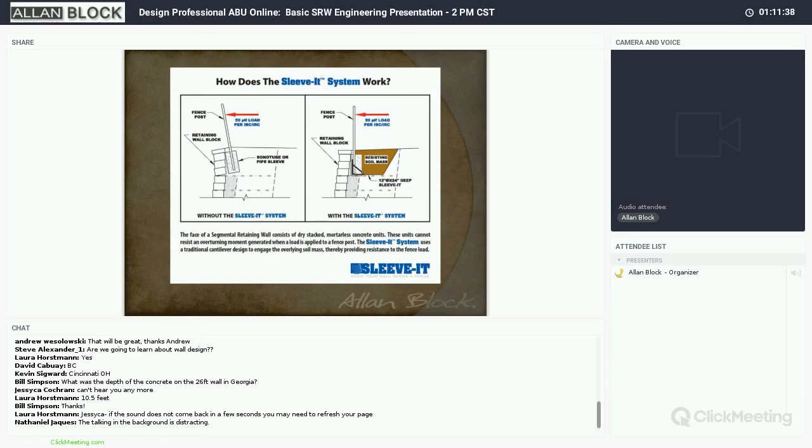But to kind of wrap things up, I want to talk about one last product. It's not Allan Block again, but it's called Sleeve It by Strata, which I have to change the banner across the top here. Strata is a geogrid manufacturer, or a geotextile, and they bought the rights to the Sleeve It system itself, but it's a cantilevered system, and it's really to resist the load that's applied. So you get that cantilever system, you get this resisting soil mass up here that then resists any kind of overturning for your 50 pounds per lineal foot for railing or small chain link. You're not talking about wind fences or that type of structure, but another great product to have as your background.

And then to finish things off, since I showed you a wall that failed, I better show you one that doesn't. This is San Diego Jewish Academy. This is about 55 feet from bottom to top in Southern California, built in the late 90s, early 2000s. Still there today, so if you go down, I believe it's Interstate 5, and look towards the Jewish Academy, you can see this from miles around. About 100,000 square feet, Southern California, so they had a high seismic event.

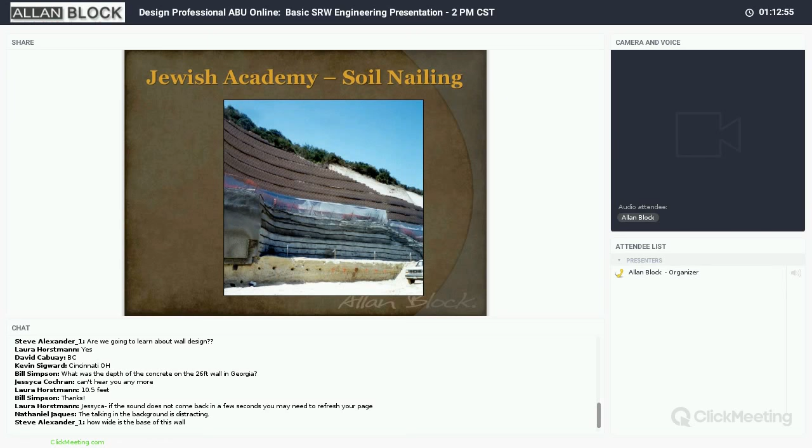Steve, your question on how wide is the base of this wall? If I go back to my last slide here, they did use an oversized, so they've got 12 inch by 24 inch in the bottom, and then up here I believe this actually went to 36 inches by 12 inches, and they incorporated a piece of geotextile into the base of that. The soil nails, off the top of my head, I'm not 100% positive I know that answer. This case study is on our website, where you can see the full write-up and more technical information. But I apologize, Steve, I don't have the answer for how deep those soil nails went.

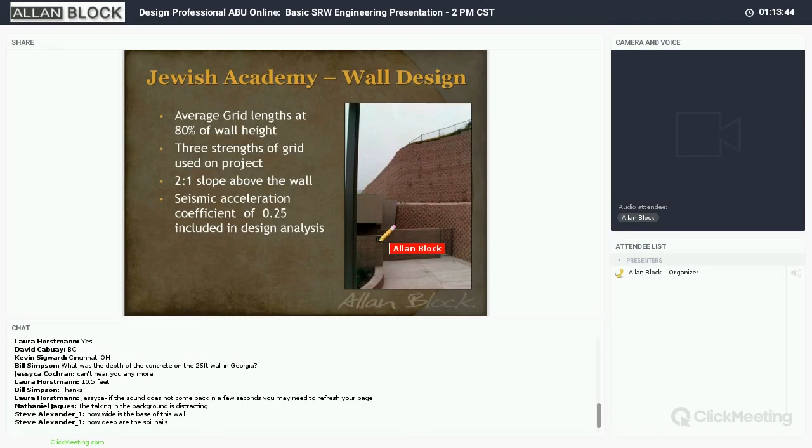So finishing this off, a couple last pictures. The Jewish Academy was actually right at the base of the wall. The foundation of that building was 4 feet from the wall. And then they did put these planter areas in to grow ivy and something green along the face. If any of you are from Southern California, or have traveled there, you don't get rain very often, so I believe it's still brown today. So great thought, but it just didn't pan out with the vegetation.

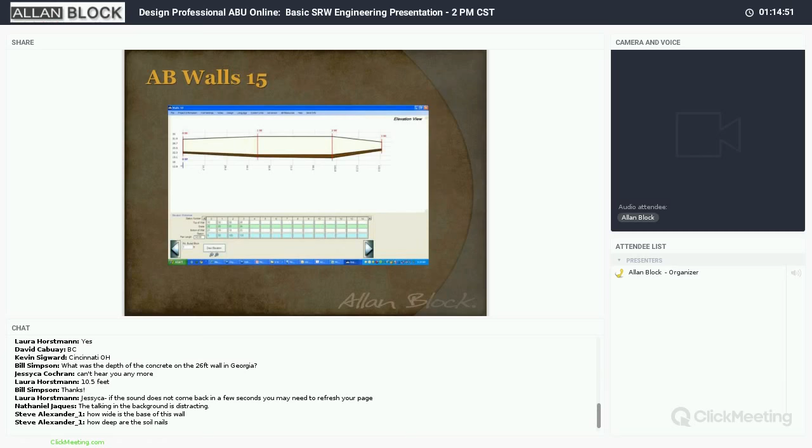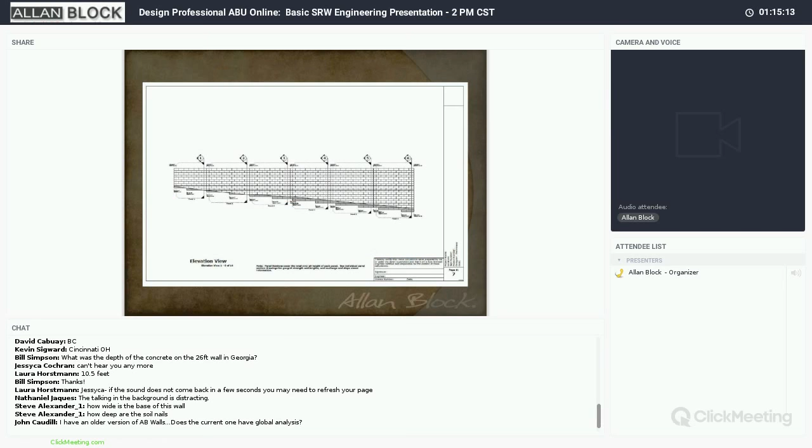You can do elevations, multiple cross sections, plan view. Here we're looking at the section calculation screen, running ICS, your Bishop's analysis, but then getting into the material estimate on that project, then the export functions. You can export to a submittal drawing, to a shop drawing in PDF, or you can also export this to AutoCAD. So you have full calculations, full profiles, geogrid locations, everything drawn to scale for you. So definitely a good tool for your toolbox, especially on the design side.

John, you asked, you have an older version of AB Walls. Does the current one have global analysis? AB Walls still does not run global analysis, but the AB Walls 15 version, the current copy, does export to a ReSSA file, the ReSSA program, which runs global stability.

So it does export everything into ReSSA that you can import in and hit calculate to check your wall for global analysis. And that is in the current version. So if you have AB Walls 10 as your old version, we can use those same ID numbers and make sure that we get you updated to the current.

But that's kind of where I'm going to leave things. I'm going to stop right here on another case study, which is DePauw University in Greencastle, Indiana, is where this project is. Again, there's a lot of resources here for you.